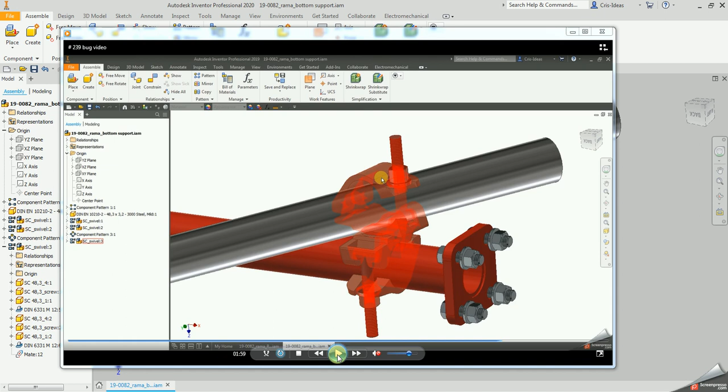Do you remember bug 239 from Inventor 2017, later 2019, when it was not possible to solve a simple assembly with a flexible clamp? Well, I reported that, and I got the answer that it works now, supposedly works in Inventor 2020. So once I had time, I tried it, and obviously the reality turned out not to be as nice as Autodesk claims.

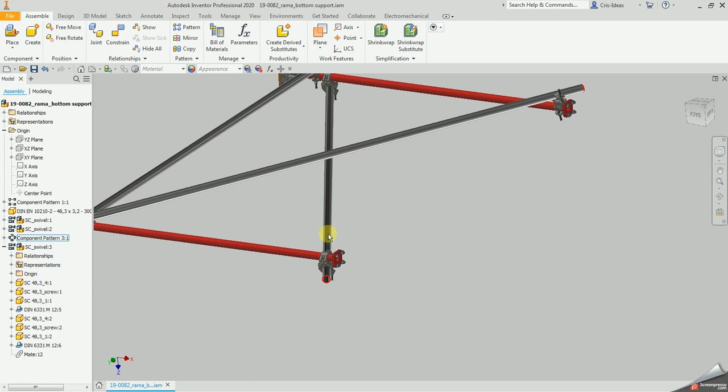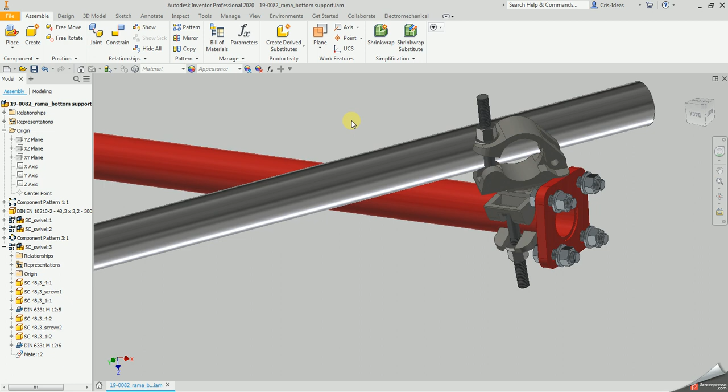So this is a video of the same bug 239 from Inventor 2020. Basically this tube, this pipe, is placed using the clamps, and this tube is exactly on the opposite side. This clamp should be able to solve itself once an axial mate is applied between the axis of the clamp and the axis of the tube. Let's see how this works in Inventor 2020.

If I select the axis of the clamp first and then the axis of the tube, initially this constraint is applied. If I select first the axis of the tube and then the axis of the clamp, obviously it still doesn't work. But let's give it a chance, let's apply the constraint in the way it works.

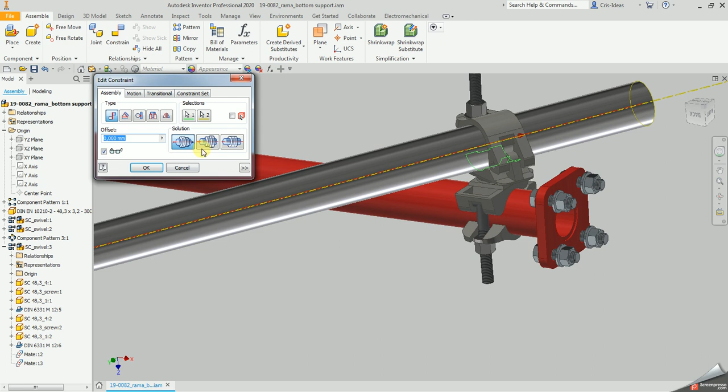Initially it works, but now let's try to edit this constraint and just change the direction. And now the solution is, instead of just rotating the clamp along the pin axis, it just flips it around without much sense. Also what is noticeable is that...

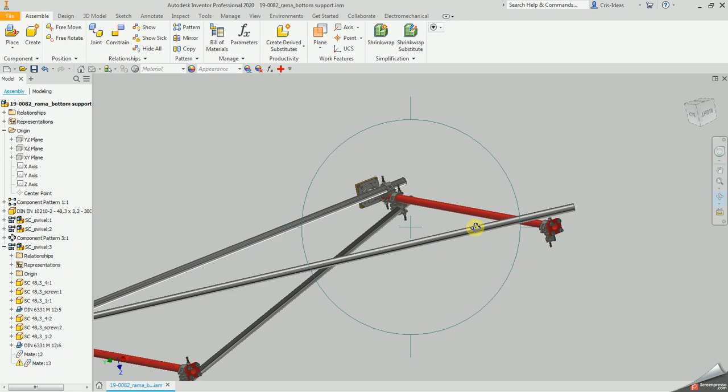In the process this clamp itself is solved badly, because this bolt is now turned opposite to what it should be. It should be aligned with the nut. So currently this still does not work in Inventor 2020.

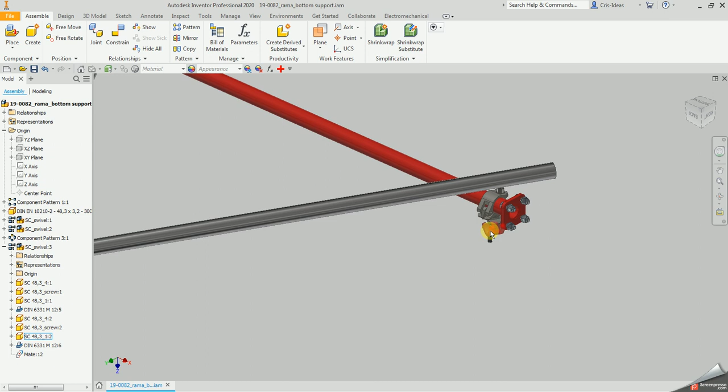So flexibility - I'm not claiming there isn't any change, because there is. There is some change, but still it's not working, and currently it doesn't even... it shows an inconsistent relationship. Oh, of course it is an inconsistent relationship because you solved it badly. So no, it is not working.